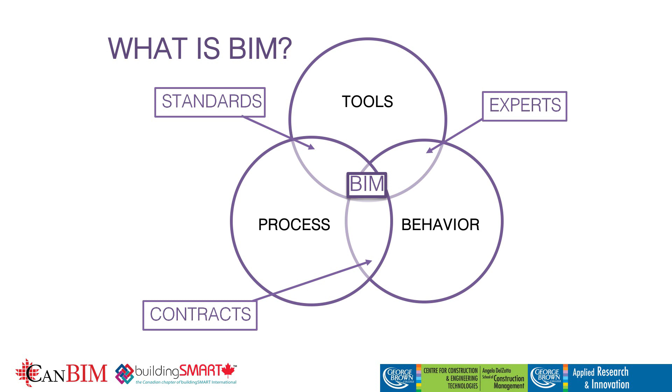Between tools and processes, you're going to have standards. Going to what Joe was saying, some of the things they were struggling with is putting these standards into place. So how the tool will change the process now. And then behavior on process, that goes to if you want to make sure people are following the process, you create the standards, and then to enforce the standards, you create contracts.

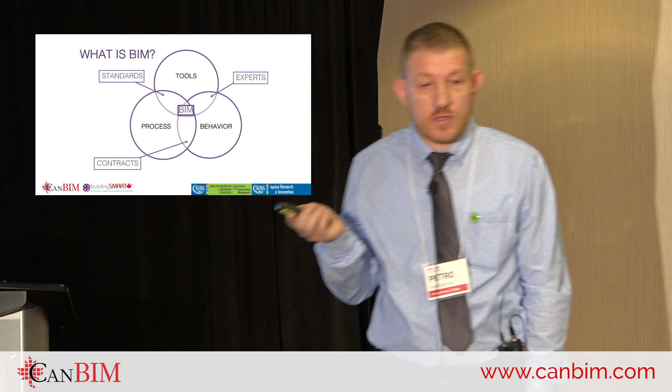So having said that, that's BIM. Now, what am I going to talk about today? I'm not going to talk about exactly this aspect of BIM. Before I start, I want to briefly touch on what we do.

We got a $2.4 million research grant from NSERC to actually explore the tools that I was talking about, processes, not behaviors. We have had almost 32 research projects with different partners. And what is most important, and I'm more proud of, is we had 20,000 hours of student work. So our students are the ones that will actually do the projects. We guide them through the process, teach them the tools, but working with us, they come up with the solutions.

So now we go back to our case studies. The problem with BIM is data. There is a lot of data. What do you do with it? So constructors need data for different purposes, facility manager owners need that for different purposes. So how do you make sure that the data that you need is in your model?

So these are things that we try to figure out. For buildings, working with the data, coming up with all these Excel spreadsheets that facility managers use and try to operate the buildings.

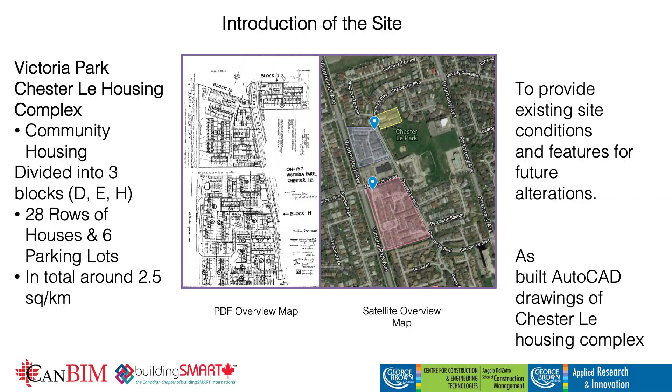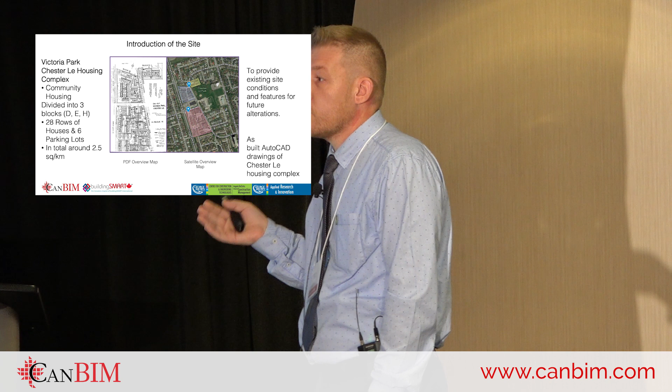So we had a big research team for this because, as you see from the map on the site, it was 2.5 square kilometers of an area. The main focus was not the building's interior, but everything that had to do with outside - landscaping, roads, curbs, facades, buildings, anything in this 2.5 square kilometers - we had to record and create these models for facilities purposes.

So the first step we had to do is identify what are the tools that we're going to use for this. So if we go back to our first slide - tools, processes, and behavior - what are the tools? For the tools, we decided to use laser scanning.

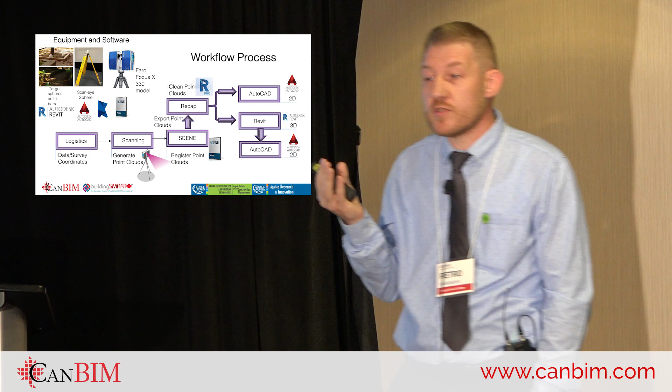But at the moment that we were using the laser scanning, we also wanted to georeference the laser scan, so all the data that we're going to have on the scan was georeferenced - so we have the X, Y, Z elevations. So to do that, we use this

scan-eye sphere. So basically, I'll become a little bit technical now - it has these prisms that you can actually use to locate where exactly that point is set up. So first we had to actually create the points on site.

So we created 8 points, and to make sure that we had control over this large area, we created 4 control points on one corner of this area and 4 control points on the other. So when we started to scan, we started in one of the areas, and we registered that with the geolocates, and then we ended up on the other side and checked how accurate the registration was done within the software.

When we finished all the logistics of how we're going to do the scanning, we spent almost a week or two weeks on site, so the students were very eager. We used two scanners, so we had two teams going. There was a lot of learning we had to go through there, because now we had two sets of data that later on we had to put together.

So all scanners were labeled with names, the cards that we used were labeled, everything that we did was labeled to exactly know what the process was. So if we had any issues later on, we know exactly which scanner it was, at which location, so we could go and rescan that area or see how that could be fixed.

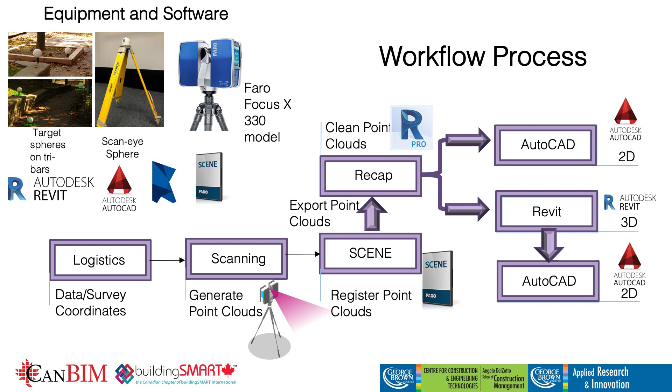So after we did that, we checked the process of going from point cloud directly to AutoCAD. That lasted a week, and then for two or three months we actually focused on Revit, and then from Revit we exported also Civil 3D, but I'll explain that a little bit later.

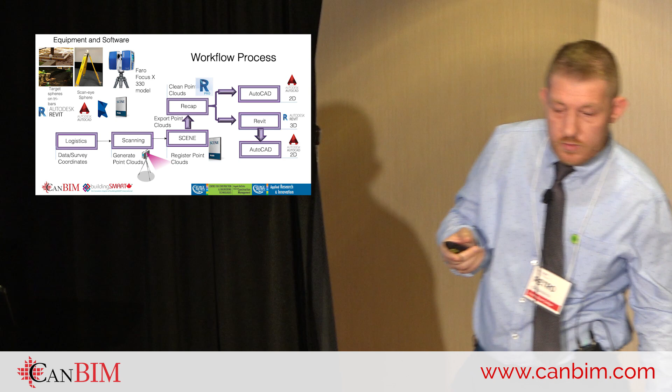After we established the process, we said, okay, now how are we going to manage this data? Because the scanning alone was one terabyte, and one terabyte of scanning is a lot of data.

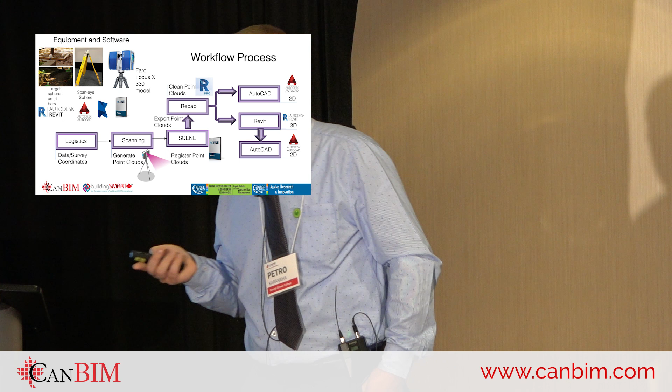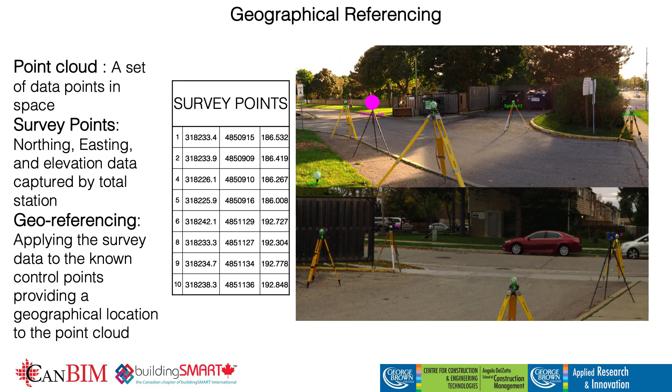So this is the point on the site where we actually put the georeferences. We have the elevations like northing, easting, and then this was our first scan. So we scanned with this, and then anytime we would register, we had this as our initial scan. This was very important because we wanted to convert the point cloud into a surveyed point cloud.

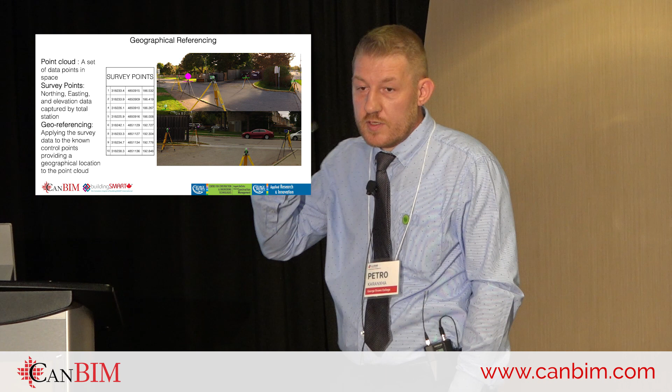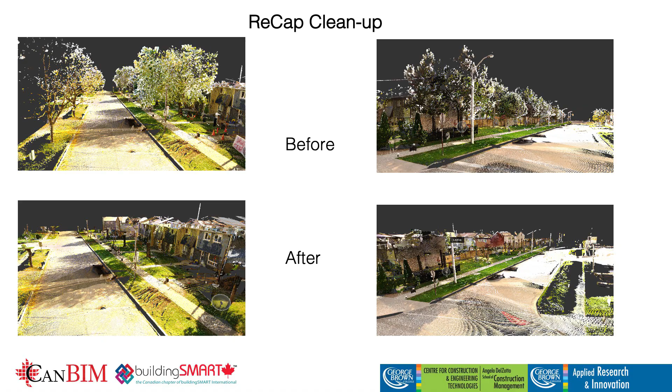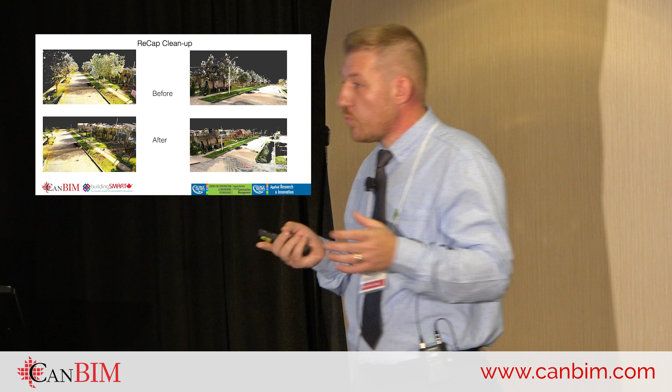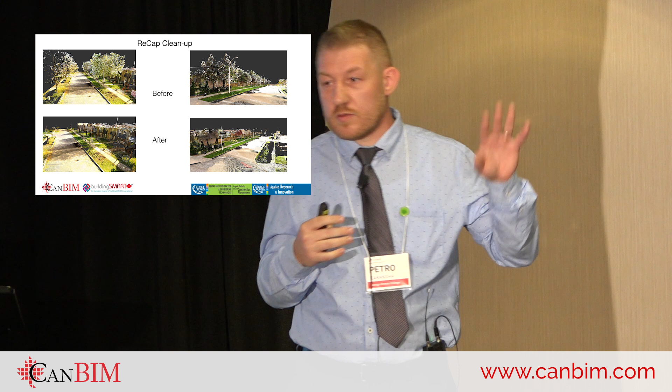Then there was a lot of work to clean the point clouds, because I don't think they were interested in how many leaves there are on the trees. So we figured that up to one meter at the trunk of the tree, just to know how big the tree is, was enough information for this exercise. We had one student, very patient, who went and actually cleaned one terabyte of data and learned a lot about how to manipulate these things faster. So we also created a process of how you should actually do this.

After this, we started with, as I said, AutoCAD. It was very limited and also very grainy in the software, so it was not meant for that particular process.

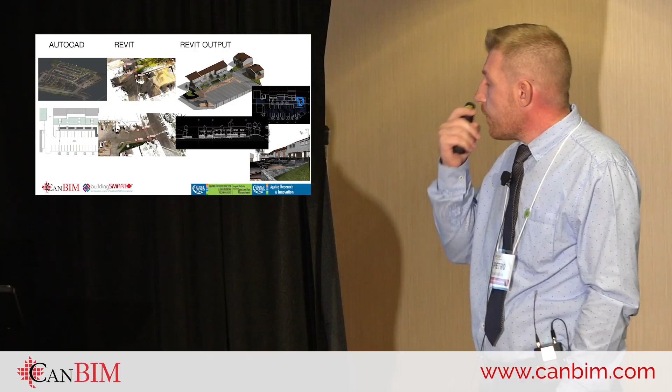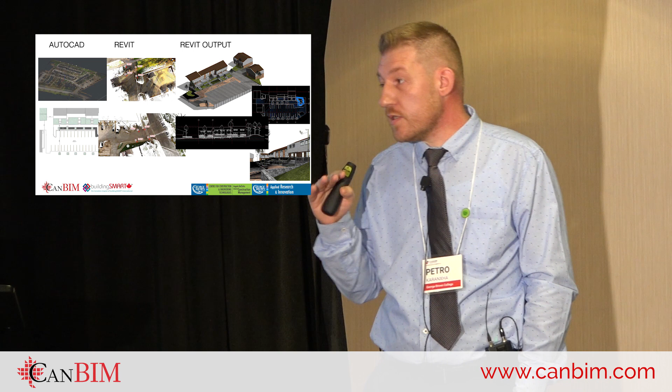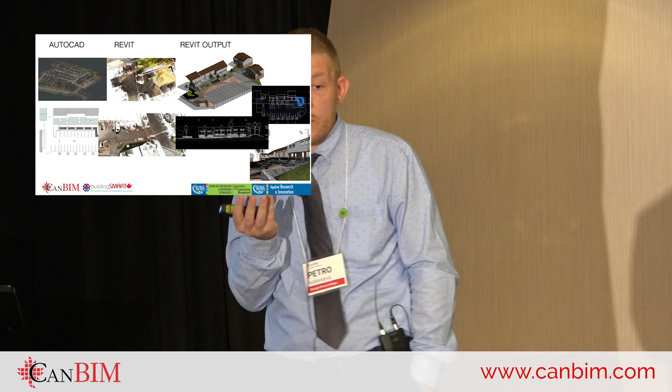Then what we did is when we brought the point cloud into Revit, we already had the point cloud georeferenced. So we started in Revit with the actual XYZ. All of our model is georeferenced, all of our plans are georeferenced based on those four points. So we used the point cloud as our survey to bring it inside the model, so we didn't have to struggle after with, okay, how do I change the true north, how do I change the origin point, like the three different coordinate systems in Revit, which you don't want to mess up.

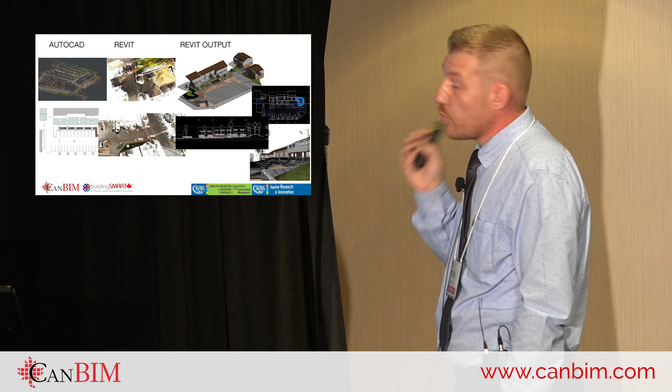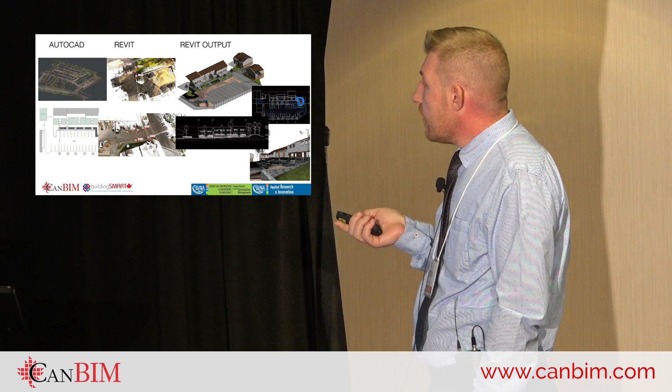After that, we were able to actually produce the Revit model, and we also had a lot of information embedded into it. So here is how the workflow actually went: point cloud, Revit, and then at the end, the students always like the renderings, they say it looks nice. They get ownership in the rendering when they do the renderings.

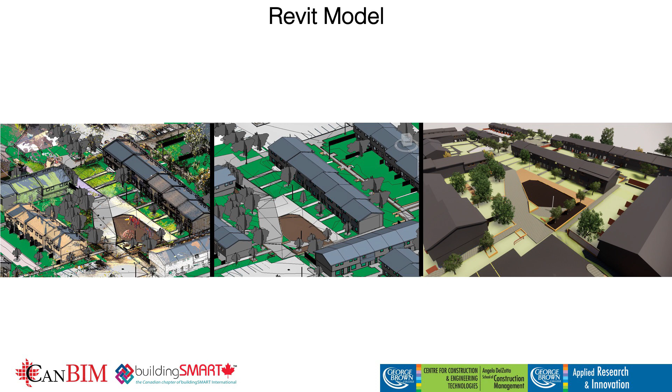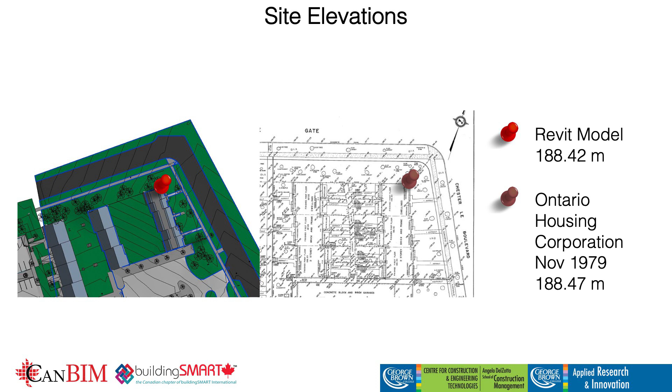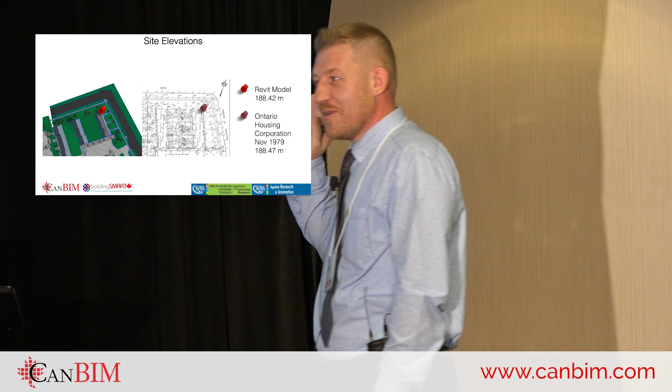Now, going back to one of the important points: we had the red point, the Revit model elevation is 188.42 meters. And then we checked the survey from 1979, the elevation is 188.47. So we only have 5 centimeters of discrepancy. In 40 years, I don't know what the reason is—hopefully that will not be one of the questions. But 5 centimeters, I think, is pretty good.

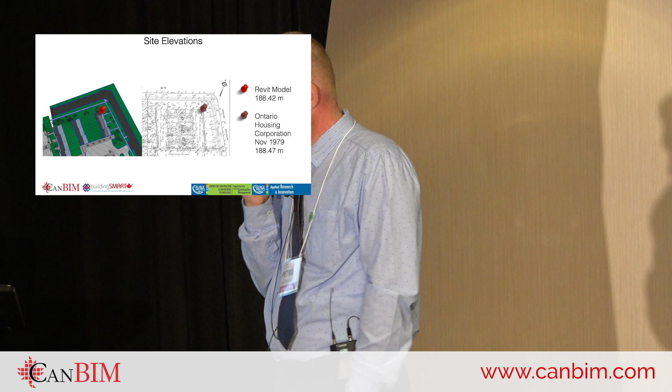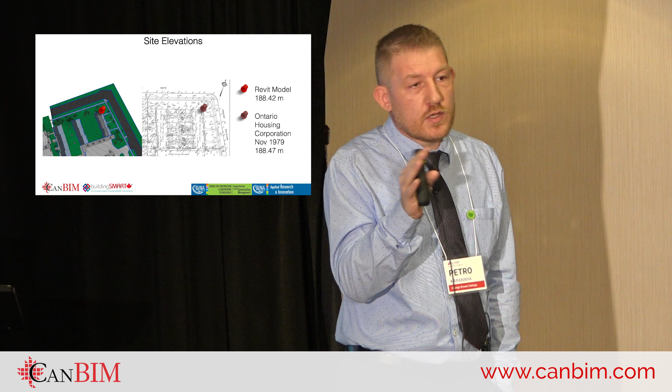And we checked other points too, and the biggest discrepancy, I think, was 15 centimeters. But that also has to do with how some of the point clouds were registered and whatnot, because in some point clouds we had around 26 millimeters difference. So that actually might be one of the issues.

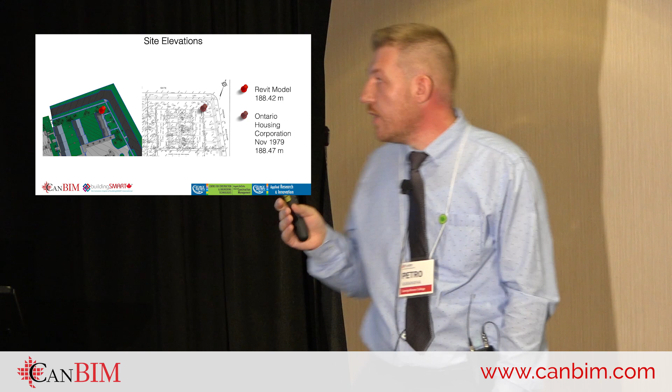So after we did this, then we had the meeting. Everybody was happy, saying hey, look at this, we have a drawing. But what can we do with this drawing, with this 3D model?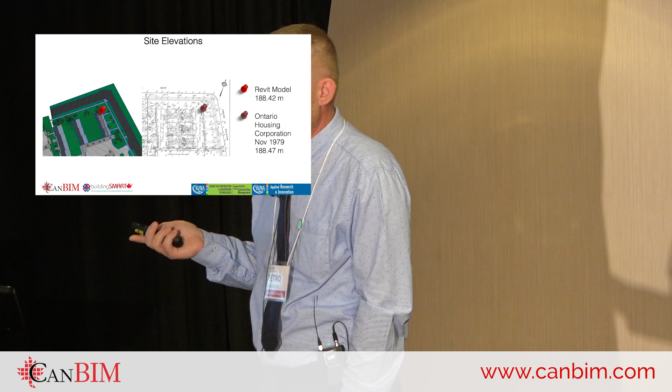And I said this: if you want to change the doors, you have 361 doors. This is the elevation of the door, and these are the dimensions of the doors.

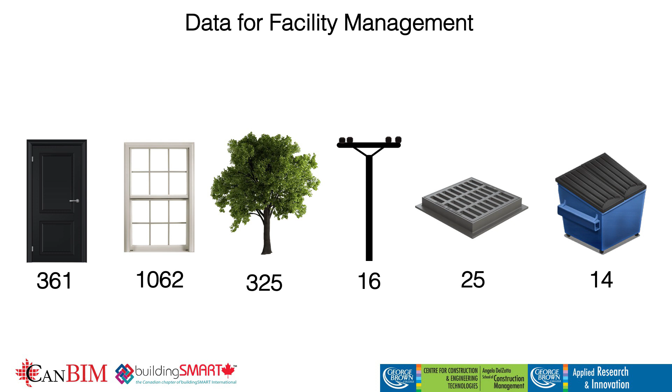Some of the challenges they have is, for example, if they have to change the windows, and they have 1062 of them, a trade will go and measure just a typical window, and sometimes they have like a 5-inch gap on the window, or 6-inch. So all of those...

Issues that they have, they started to say, okay, now we know how to use this. And when we had to deliver all the project, they said, oh, but we want something else. I said, sure, can we have one of your students so they can operate this? I said, yeah, that's fine.

It took some time to actually put all of this together, but what was important was that we actually recorded all these steps. We recorded all these steps because we're in academia, so I hope I can teach this to my students in class - all the good things you have to do and all the things you might have an issue with.

So how does the tool help you when you're actually building something? Because at the end, if you don't have the process, the tool will not - you're just going to produce data. But how you use that data is the key, I think.

And I think in this particular project, what we tried to do is, okay, there is a site, we have no drawings, we have no information. We acquire the data, we use the laser scanning, and then we build the model for the facilities management purpose.

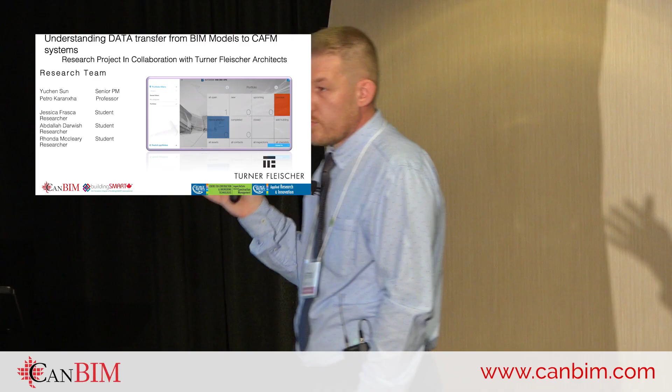Now, on the second one, we wanted to check off the box - you get softwares. Now, all of them claim to do miracles, so we want to see how the miracle works.

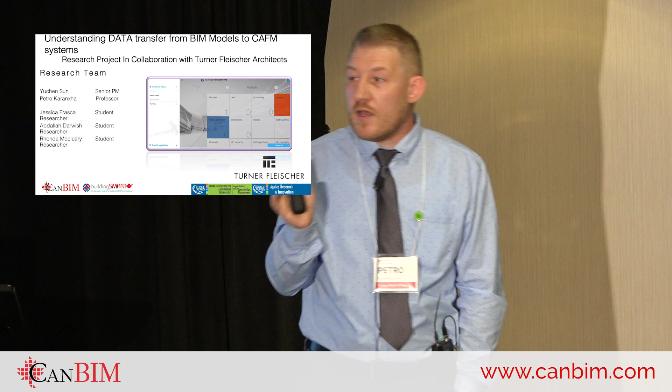I think I should go on the next slide. We compared Archibus, Maximo, FM system, OpenMaint, BIM 360 Ops, Ecodomus, BIM server, and Forge. So we started with this table.

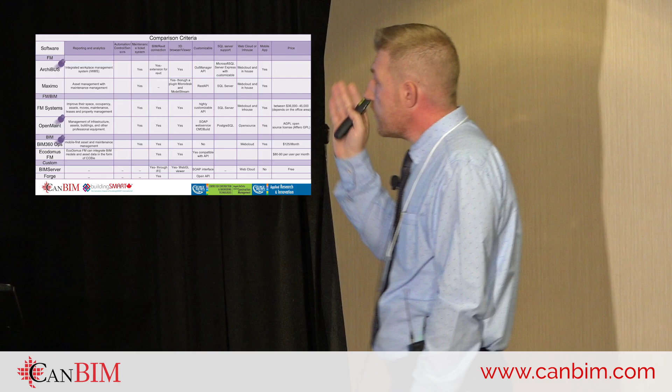And in this table, what we did is, okay, let's see first of all which softwares can we use, what is the cost. So all the important things are reporting and analytics - what type of reporting and analytics will this software do? Automation, controls, sensors - do they have any of these capabilities or not?

Then we went to BIM Revit connection. Okay, so they say that they have a BIM Revit connection - we're going to explore that. Then we go 3D browser, viewer - do they have it, yes or no?

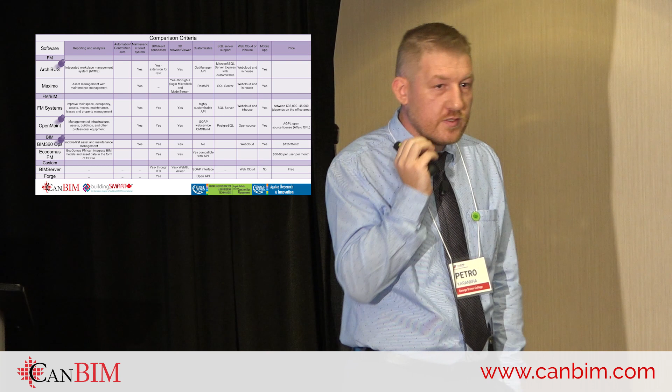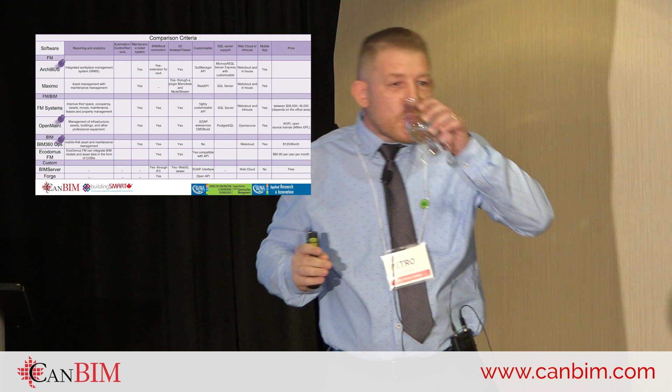Okay, now when we started, we were very optimistic, but some of the software providers didn't want to give us the software for free, so we had to buy the software for 1 month. So we said, no, we don't want it. Well, if it's $50,000, I don't think anybody will pay $50,000 just to test something for a month.

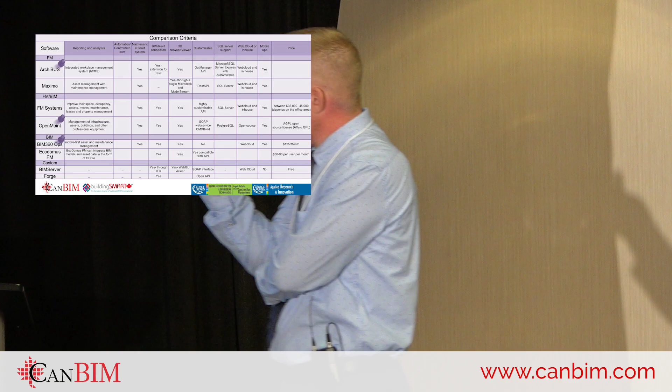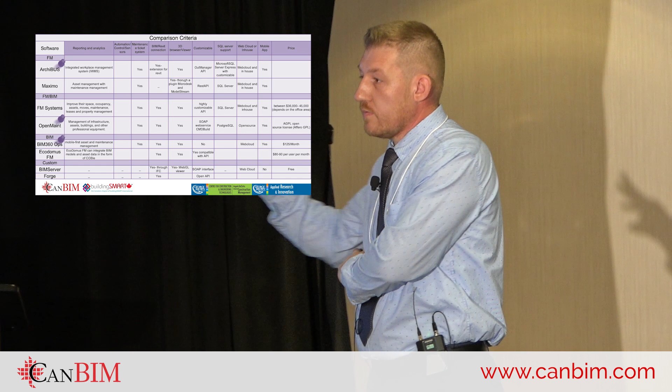But anyways, at the end we actually ended up with these three software: OpenMaint, Archibus, and BIM 360 Ops. These were the ones that we could actually test and check what they can do. Now, BIM Server and Forge, we could have gotten them for free, but because it needed a lot of coding and setup, we said in a month it's not feasible.

So after that we said, okay, we went to COBie standards and said, let's analyze how we can structure the information in Revit using COBie, and then test that particular information to go from Revit to the other software and see what off the box will automatically happen without us doing any other efforts. So in the BIM 3D model, we identify the space and the equipment that we want to go to the facilities management software, and then assign all the COBie requirements, and then from that we go and check the data.

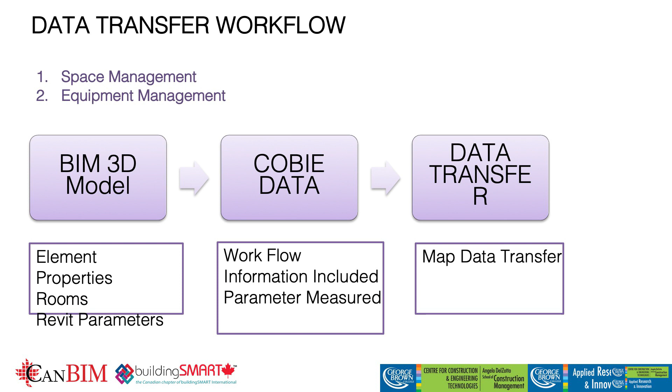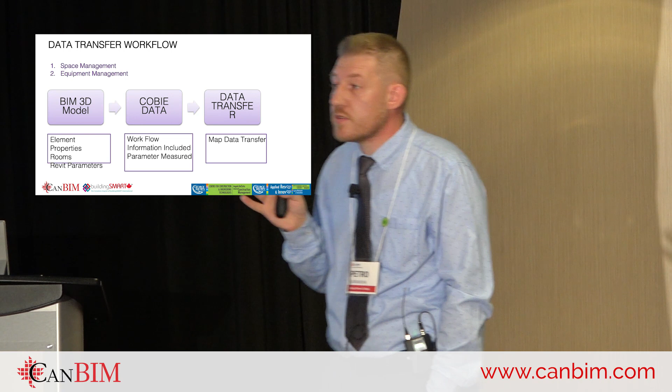So in BIM we checked element properties, rooms, and all the Revit parameters, based on how we connected that with COBie. Then on COBie we checked workflow - when we wanted this information to be embedded, what information was included, and what parameters we were measuring. So we needed to know all of that information in our COBie spreadsheet.

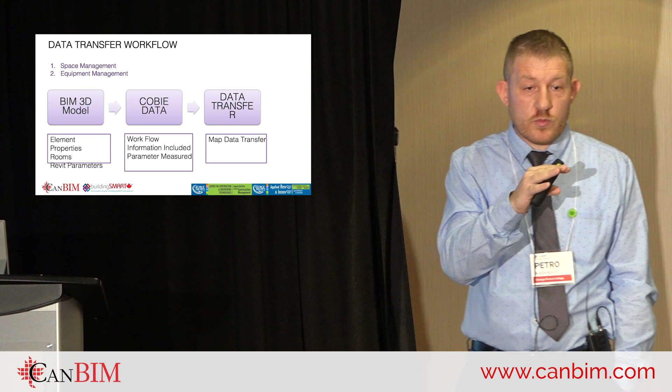And then at the end, we were checking, okay, which data from this actually exported from Revit to the other three software. Because this would give us the idea that, okay, if we need to put this information in a facilities management software later on, we would know that we have to do extra work or we don't have to do extra work.

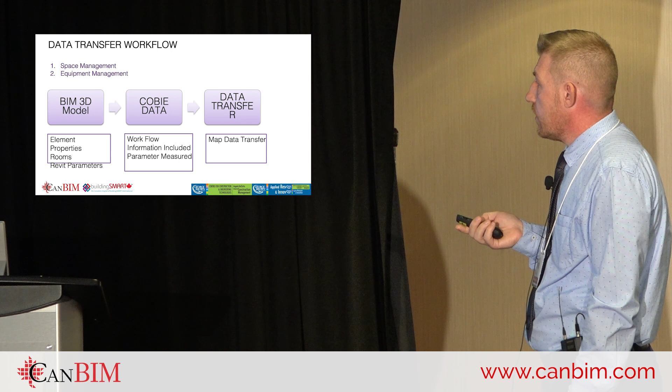So I'll start with OpenMaint. We did not test it because the free version you could not do anything with. They wanted money after. But Archibus, there were some data transfer, but it needed a lot of setup. Like if you get a Revit model and you just say, okay, export this data, not much data will automatically go from Revit to Archibus.

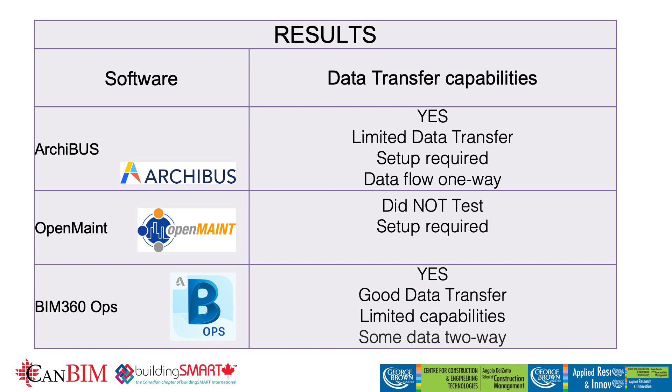BIM 360 Ops had a very good data transfer, but BIM 360 Ops has its own limitation. It doesn't have an open API, so you cannot really do other things if you want to. But also one of the positives was that if you put information on BIM 360 Ops, it could actually update your Revit model. In Archibus, that doesn't happen, it's just one way. I don't know if they have changed this, but this was last year.

So that was in terms of understanding how you can transfer data from Revit or BIM authoring, which we... I think I'm getting dry. So, how we could take the data that we need to use from Revit to the facilities management software.

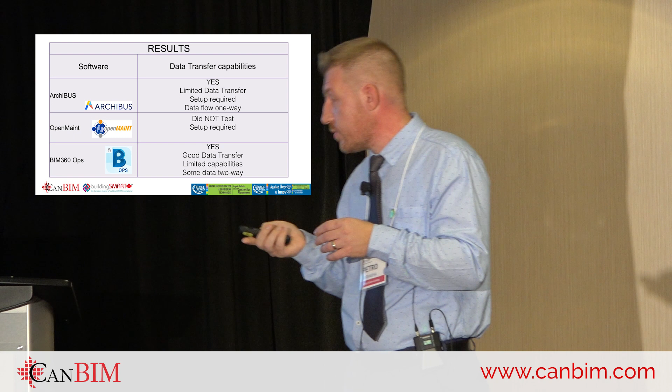And now I'm going to go to the last project, which actually focuses on how you can use Dynamo now in an existing model for facilities management purposes.

In our program, we have a BIM program at the college, so the students have to come up with a capstone project. So I asked them to learn something they have passion about, whatever they want to learn in their capstone, come up with an idea they like to explore. I don't have rules in terms of, oh, you have to find out this. No, whatever you want to explore, find a problem and solve it.

So they said, oh, we want to explore Dynamo for facilities management. I said, great, so how are you going to start? They said, oh, we want to build a floor plan, and after we build the floor plan, they build the mechanical model, and they said, okay, we want to see how we can use Dynamo to understand the information embedded on air terminals.

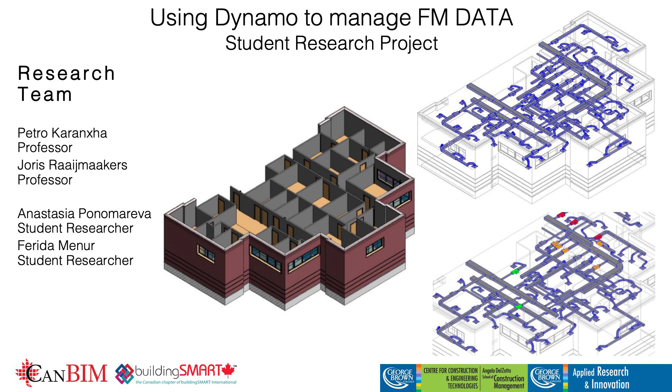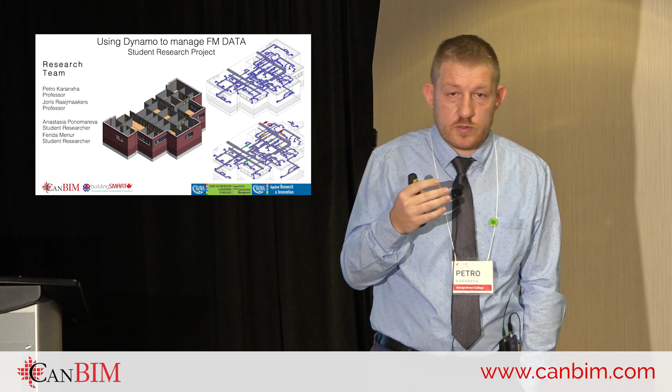So if we want to change any filters on air terminals, or if we want to do any updates, we want to visualize that information. So what exactly they were looking for is to check, so Dynamo could calculate how many days you need before a service or a change needs to be done to the terminal. So how can you do that service?

Then they had to import - this was all done in Excel. So we were thinking that, okay, there is an existing facility, and all this data is usually stored in Excel. So how can we use Dynamo to actually import this into a model and start using the model for facility management purposes? So this is the Excel spreadsheet.

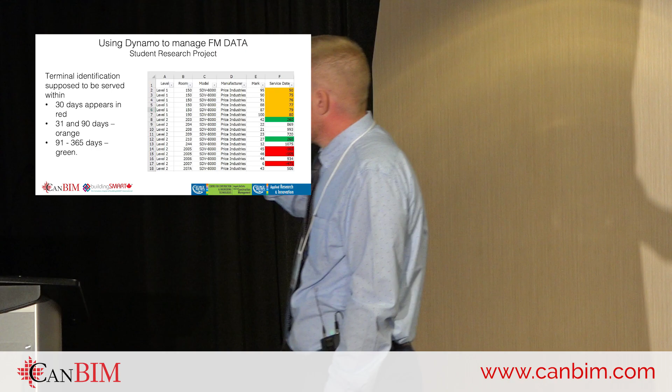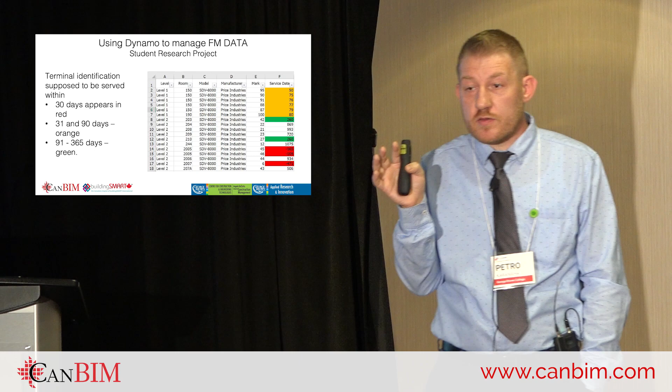So they built the model, and then they built this Excel spreadsheet. So they said, okay, we want - they put the levels, so rooms, model, manufacturer, a mark, and a service date. So each of those air terminals had a service date with a particular amount of days remaining.

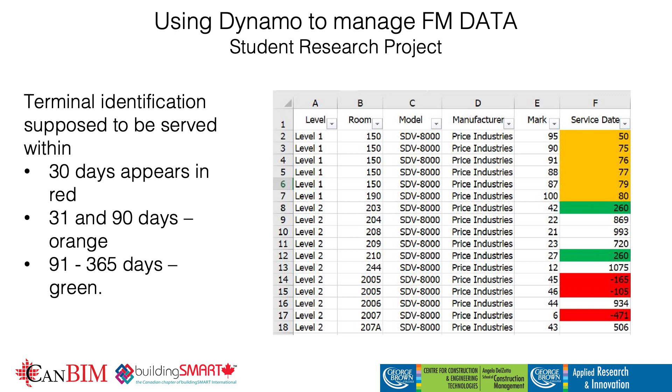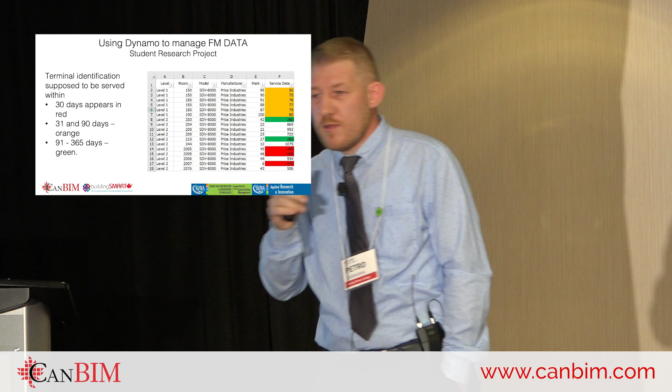So if it was within 30 days that this air terminal had to be serviced, they highlight it in red, so it will show in the model. If it was between 31 to 90 days, then it will highlight in orange, even though it's yellow. And then green means that you have around 365 days to do any services, and over 365, it's not colored.

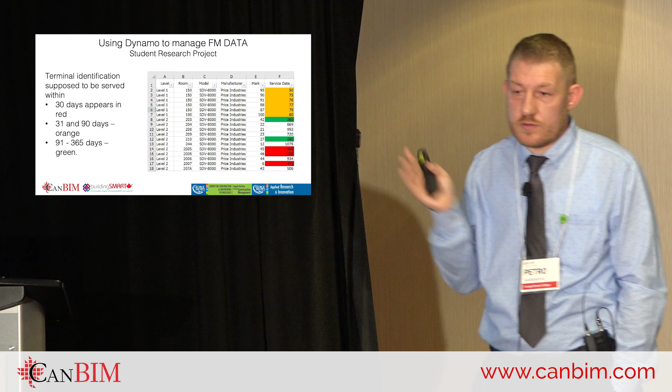So this is the script. So they came up with a script, and all of this is off the Dynamo tool. Like they didn't have to do any Python coding except a little bit here when you populate the parameter, they have to assign the number of days with the color to match. That was the only time they had to.

And they did all of this work in 3 months as part of their class. And I asked them to be here today, but they're too shy. But...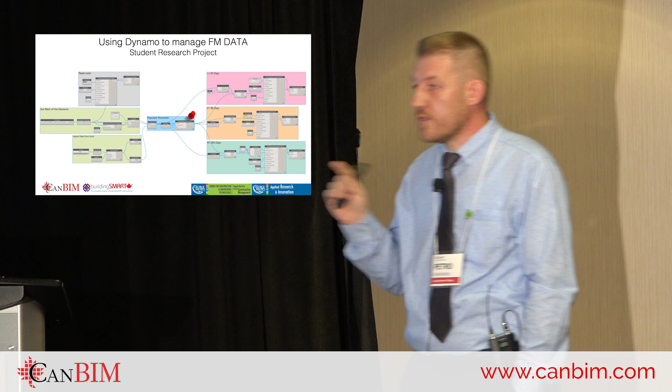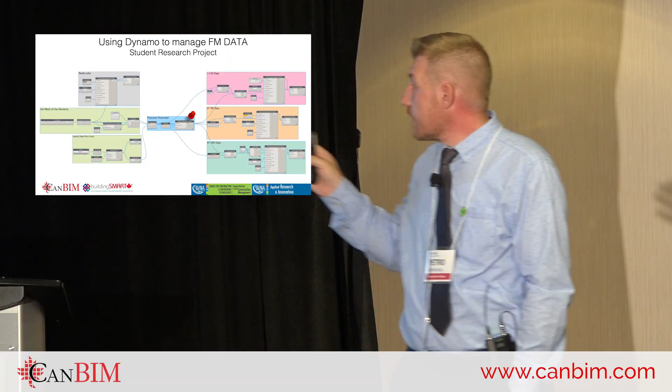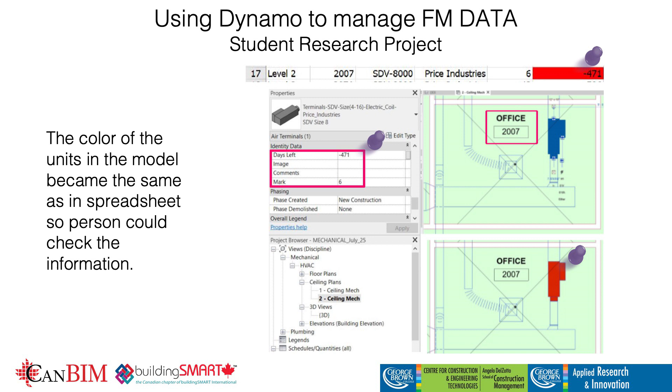So after they completed this - oh, that was my pin, that's where you have to code. So after that, we were able to see, okay, this is the Excel spreadsheet, the original one. This is where in the properties it will be located. And then it shows that Office 2007, the air terminal, has only 471 days left. But that's minus, so somebody forgot to change it.

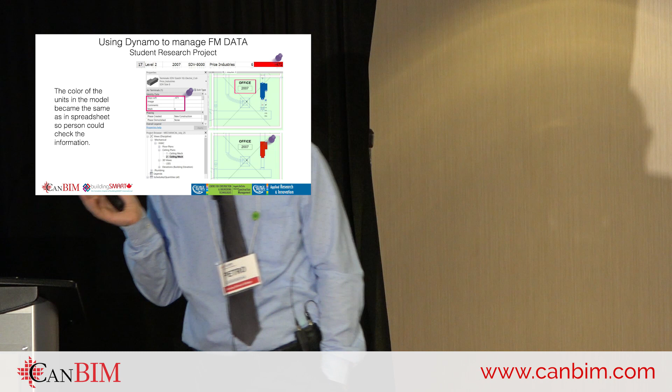So you can use this for any other thing that you need to check. The only thing you will have to change is, instead of an air terminal, you can check, okay, how many chairs do I have? How many desks? Where are they in the building? So that particular code, by changing a few of the properties, can be applied to a lot of the elements in the facility.

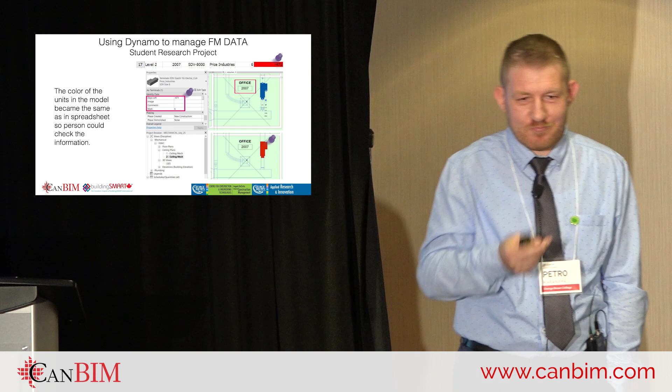I have two. So this was one of the scripts. One of the scripts was, okay, you have an existing facility, you have an Excel spreadsheet, you build a model, how do you link the information from that Excel spreadsheet to the model and how you visualize it.

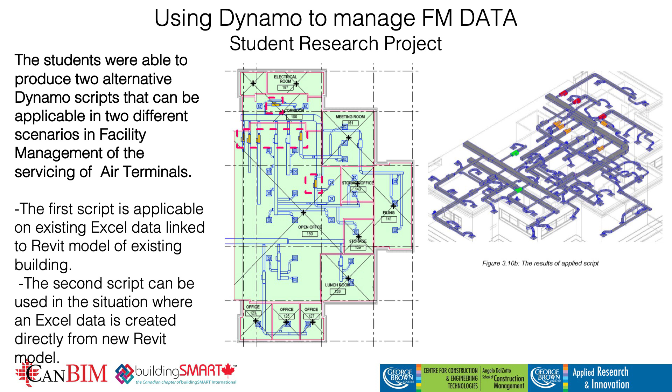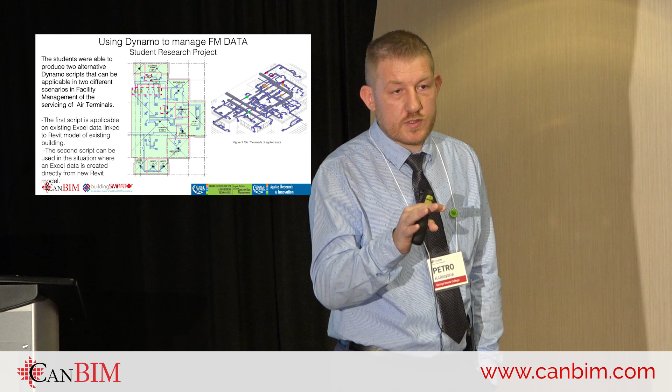And then the other one, we said, okay, what happens if you already have a Revit model now? So they did the opposite. They exported the Excel from the Revit, went into Dynamo, put the script again, and they came up with the same results. But if you have the model, it was a little bit easier because you didn't have to script anything, because the way you are marking things in the model is much easier.